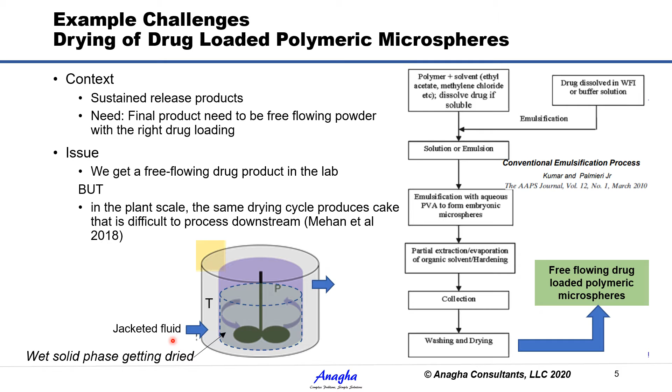But when the product temperature goes above the TG, you get the stickiness and the chances of cake formation increases. So from a process side, what we need to look at is how can we maintain, during the course of this drying cycle, the product temperature always below the TG at that solvent content at any given time.

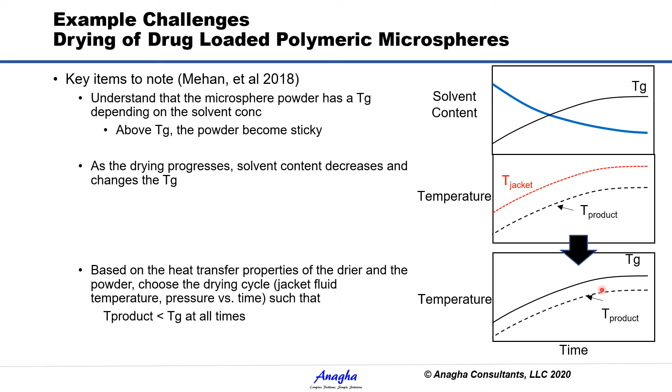Now, how we accomplish that is one of the challenges here, based on the heat transfer details of the dryer. We should be able to control the jacket temperature to achieve a product temperature that is below the TG. So if we can define the drying cycles appropriately, we should be able to get a free-flowing powder even at the plant scale.

As a second example, let's look at a case of manufacture of API crystals of certain polymorphic form and certain size distribution using antisolvent crystallization. This is a typical process used in the pharma industry. Here, an antisolvent is introduced into a solution of API in a solvent.

The expectation is, depending on the mixing conditions involved, we create saturation type of conditions for the API to precipitate out. The challenges in this type of process, as we have observed, can range from not being able to repeatably get the process under control even at the lab scale, and also, when we have a scenario established where we can repeatably get the required crystal size and form at the lab scale, not being able to translate that into a plant scale having, say, a different geometry of the vessel, impeller, etc.

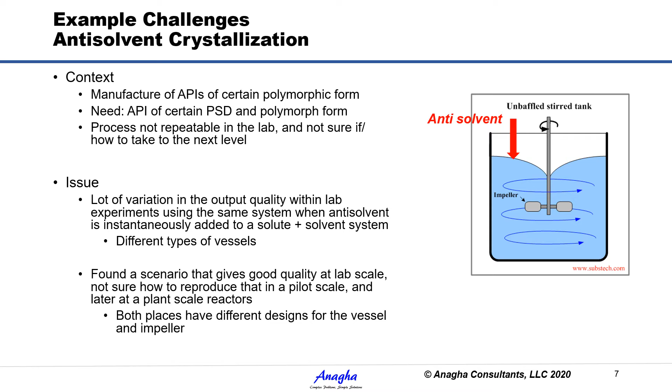Now, for us to understand where the sources of the lack of repeatability are coming from, we need to understand how the concepts of mixing interact with the concepts of thermodynamics that actually create this saturation or supersaturation type of conditions. Briefly, we need to be aware that when we introduce, say, an antisolvent, B, into a solution containing the API, A, the geometry and the mixing conditions determine in how much time B will disperse in A, and what the concentration distribution of B is like in the vessel.

These factors will determine the level of supersaturation of the API, or the level of saturation, and accordingly the formation mechanisms of the crystals will be influenced.

So how the vessel geometry, the location of addition of B into A, the rate of addition, the liquid level - how all these factors influence the concentration distribution - we need to be able to understand, and accordingly manipulate the process depending on changes in geometry or scale, to get crystals of the right size and right polymorphic nature, ensuring no quality changes as you go from one scale to another, or one vessel geometry to another, even while being in the lab.

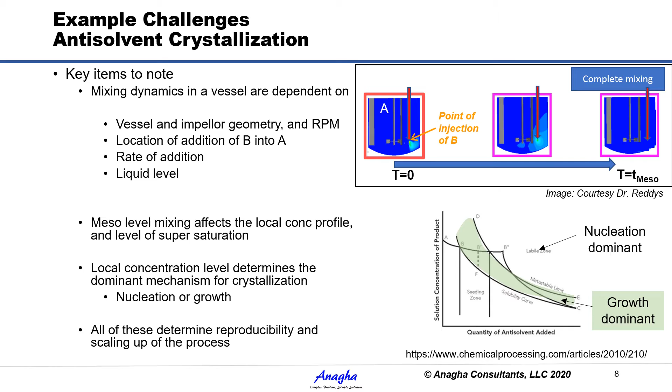As a third example, let's consider the case of dispersion of particles using a high shear mixer and stabilizing them with surfactants. This is a typical scenario when one wants to make injectable nanosuspensions in the pharma space, or nano inks in the specialty material space.

In either scenario, we have API particles introduced in a continuous phase that is getting sheared using a high shear mixer, while surfactant is being added. If you look at what factors impact the stabilization of these nanoparticles, we're looking at how well the particles are sheared, and the increase in surface area because of particle breakage or dispersion - how that increased surface area is stabilized by the addition of surfactant. The balance of these two phenomena is what contributes to getting a good product.

Now, typical issues in this type of process can be batch-to-batch repeatability within a lab scale, and translating a lab scale process into the plant, where one would use an inline mixer instead of a batch process to handle high throughput.

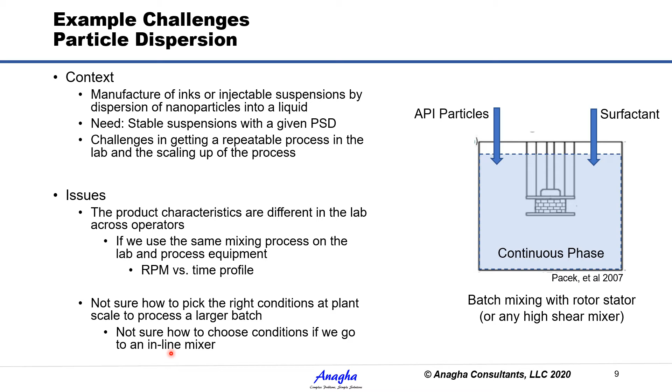What all factors contribute to changes in the mixing conditions when we use this type of high shear mixer is something to worry about, so that we minimize these repeatability issues.

For example, where the mixer is located in the batch vessel, and what is the height of the liquid column that is used - all these impact the circulation time of the ingredients in the vessel, and hence how much effective shear is imparted to the particles in a given time. These things play a role in how well, or what differences could exist, in terms of stabilization of the particles.

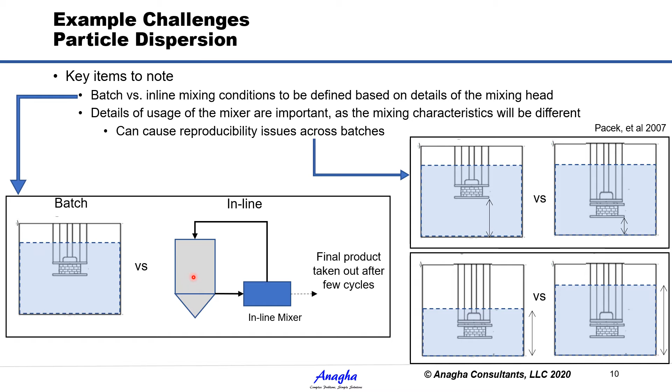In addition, when we think of changing from batch to inline mode as part of scale-up, how the shear rate, the total shear, can be balanced in these two configurations is important.

From the previous three examples, I hope I've given you some clarity into where the sources of lack of repeatability come from in the course of product and process development, especially at the lab scale, and also in translating the lab process to the plant.

Now, if we were to generalize, a typical product process development workflow in any industry would look like this: based on certain customer needs, one would have a lab scale material process development, followed by a bunch of characterizations which would tell us whether what we made is right or wrong. And if they are right, then we take the next step.

The next step involves trials at the customer sites or at the manufacturing scale. Once the needs are met at this scale, then we have a product. If not, we go back to the drawing board and the cycle repeats.

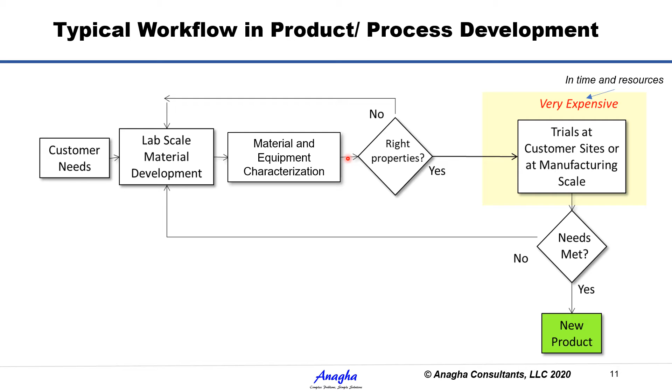Now, how well we understand the characterizations and their linkages to the actual final product properties is very important for making this cycle effective.

If this step of material characterization and its linkage to the final product properties is not well understood - either due to poor translation of the needs into technical requirements, or not using the right methods for characterization, or not understanding the underlying physics in the course of product process development - then we spend a lot of time in this cycle.

In this yellow box, we repeatedly keep going from the lab to the more expensive steps of trials at the customer sites or manufacturing scale, to verify whether what we developed in the lab is right or not.

This can be pretty resource intensive and expensive, both in terms of time and the cost of raw materials, especially if you're operating in certain niche areas like pharma. The cost of the API, etc., can be very prohibitive.

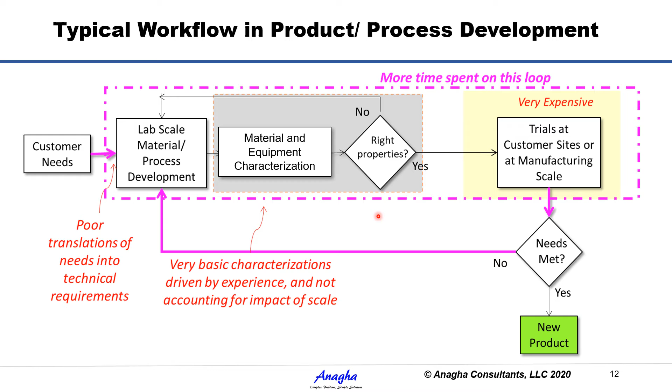If we were to focus on understanding the process and how it impacts the product we produce, its properties, etc., we should be able to focus more on this blue box and efficiently capture any misfires in our product development journey before going through expensive steps like trials at customer sites or manufacturing scale. This way, we'll be able to better translate customer needs into technical requirements, appropriately quantify necessary properties and interactions, and improve the efficiency of our product development journey.

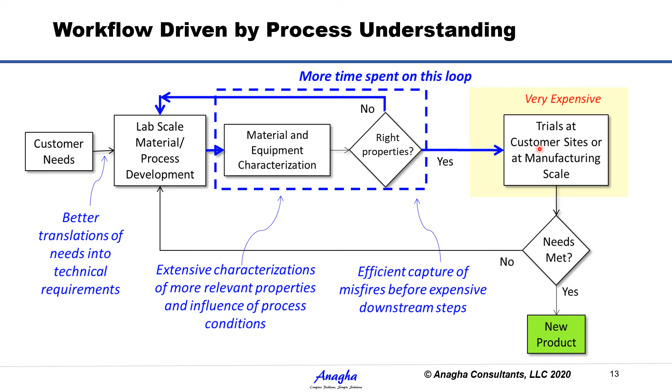In the next few slides, I'll share a case study showing how such an approach, focusing on process understanding, can help minimize surprises during product development and scale up.

This example relates to the scale-up of a pharmaceutical product consisting of a series of unit operations. For this talk, we'll focus on the scale-up of a specific unit operation: lyophilization. For those not familiar, lyophilization or freeze drying is an important and expensive step in the pharma and food industry, used for temperature sensitive products to increase their shelf life.

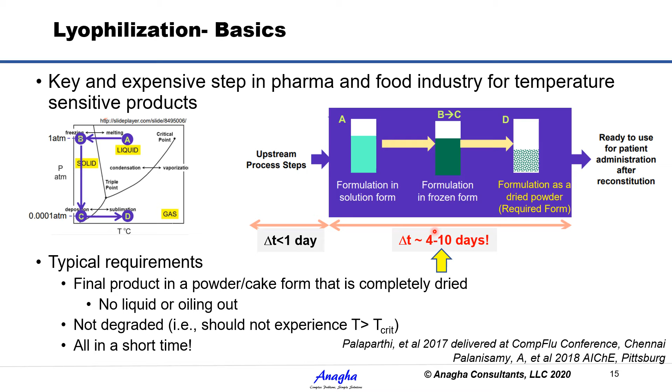Just to give you a sense of the cycle times involved: all the upstream steps in the scale up of such a pharmaceutical product would be very short, happening within a day or so, whereas this freeze drying lyophilization step can take a few days to a couple of weeks. So it's important that we get this scale up right the first time, so we don't go back and forth in trial and error.

As part of the requirements, right after lyophilization, we expect that each of these vials are dried the same way, so that there are no variations in product quality across the batch.

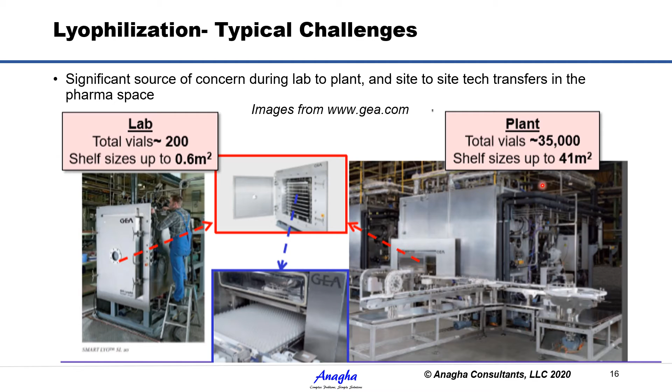What does this translate into in terms of requirements for the end user, like a process engineer? When we're talking about drying, what we care about is how you control the lyophilization chamber temperature and pressure as a function of time, such that the product temperature always stays below the critical temperature we talked about.

How do you define this lyo cycle at the lab scale, and how do you translate that cycle to the plant scale? The caveat is whatever cycle you have in the lab need not be appropriate for the plant, both in terms of the ability to dry off the product and the ability to optimally dry the product.

Given this background, plant scale optimization and scale up can pursue options like doing a DOE type of approach at the plant, or leveraging some mechanistic modeling, first principles type of approaches.

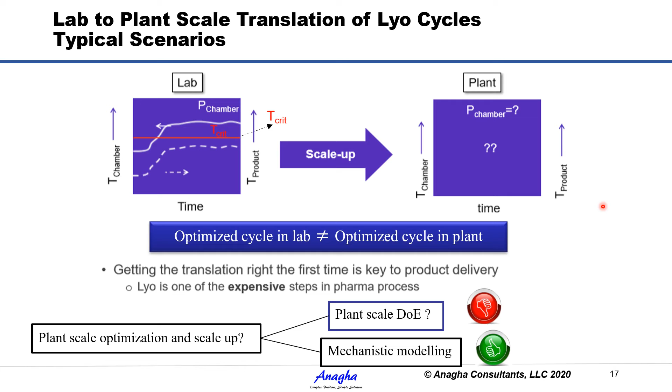Given the challenges in accessing plant facilities and the cost of the APIs involved, DOE at a plant scale can become very prohibitive, and typically your management would not want you to even consider that approach. So there's a lot of science developed in the area of leveraging mechanistic models, and that's what the next slides will show - how we were able to leverage that understanding with this need.

When the unit operates, because of the pressures we apply and the temperatures provided to the shelves, the solvent in the formulation sublimates and goes through the condenser, where part of the solvent is taken out, followed by a solvent trap, which is more relevant for a non-aqueous type of system.

Each of these units can come with limitations. For example, the condenser can only take so much of the sublimated vapors. And in this chamber, whatever shelves, whatever temperature that we are providing, whatever fluid we are providing to heat the vials, can only transfer so much heat to the vials.

So what happens at the vial scale and what happens at the overall equipment scale is something that we should be aware of to be able to effectively leverage this equipment. So this is where the need to understand the equipment characteristics and the limitations they impose comes into picture.

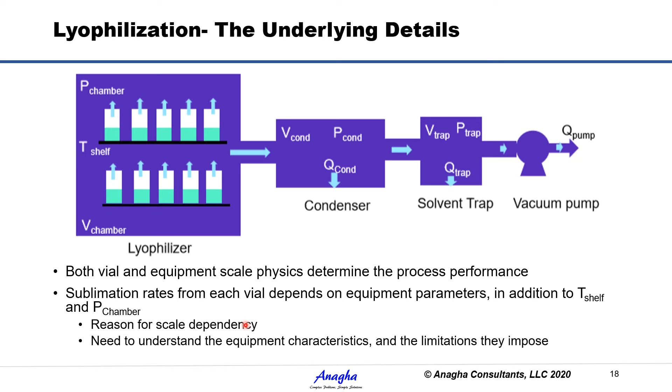And with that understanding of the equipment characteristics and the material properties, say the critical temperature of the formulation that we are using, and the process conditions we impose, we should be able to, through a kind of a mechanistic model, link them to the product quality, like the extent of drying, the uniformity of drying that we would get.

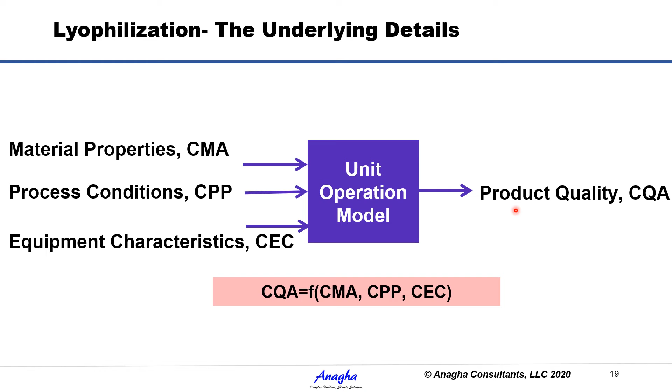If you think of this lyophilization in that sense as some kind of a black box, having some of the material and equipment parameter process conditions as inputs, you can relate them to the product characteristics, both in terms of the extent of drying and the uniformity of drying. And what would that black box consist of?

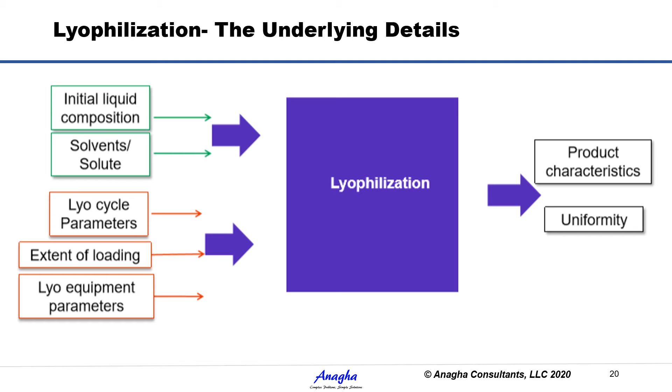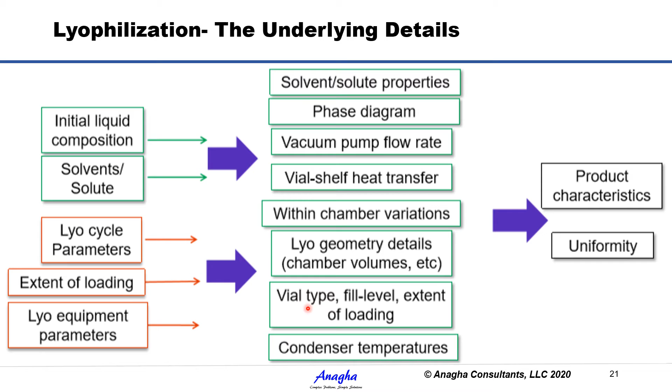Can be a bunch of the underlying physical phenomena, like the phase diagrams of the solute solvent, the heat transfer characteristics, etc., and what type of vials you are using, what fill levels, condenser temperatures, etc., would go here.

There is a lot of literature that captures these understandings in terms of appropriate equations so that we can quantify them. For example, these equations show how the heat input to the vial from the shelf balances the amount of solvent that can be sublimated.

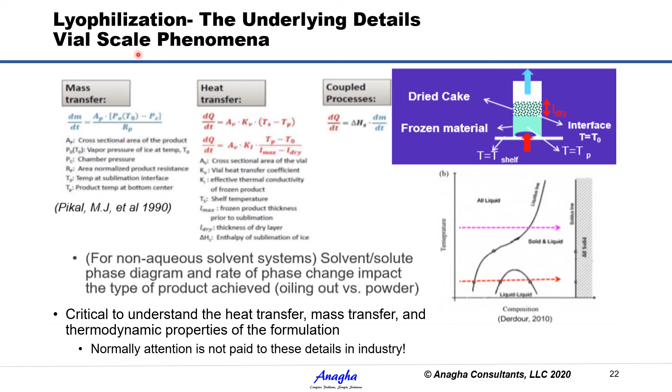If you consider this as something that is occurring at the vial scale, you can expect an equipment scale physics as well to play. For example, in the lyophilization chamber, the rate at which the heat is transferred from the shelf to the vials can be different within a shelf and across the shelf.

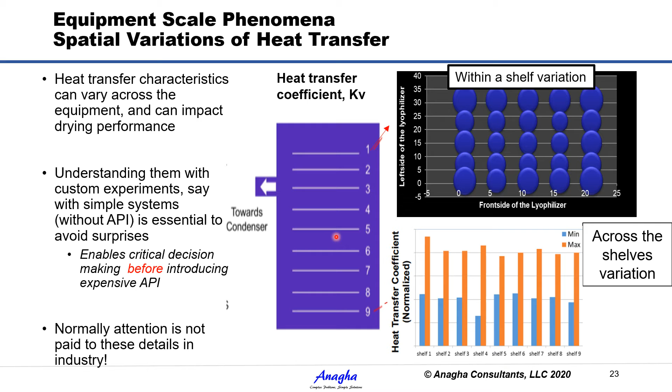This type of information is critical to know before we actually load the lyophilizer with the expensive drug, because with this information we should be able to figure out beforehand how best to design the lyo cycle so that all the vials get dried uniformly after the cycle is complete.

So with details of the material characteristics, equipment characteristics, and process parameters, the literature talks about how there is a design space over which one should be able to operate and leverage the best performance out of the lyophilizer.

Awareness of these type of details helps in the scale up and site to site transfers. There are some challenges still in the industry in leveraging these type of learnings.

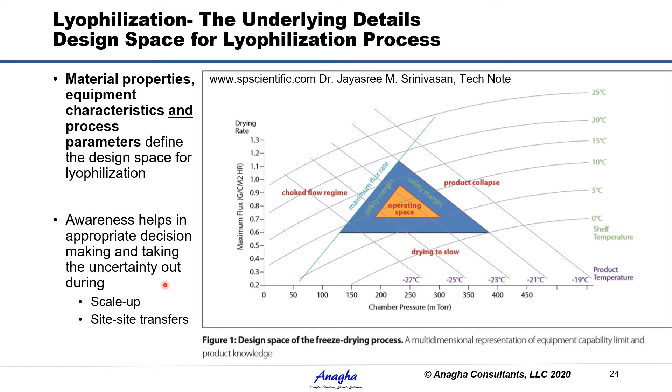Here is an example of the value add one can expect by leveraging process understanding type of approaches during the scale up.

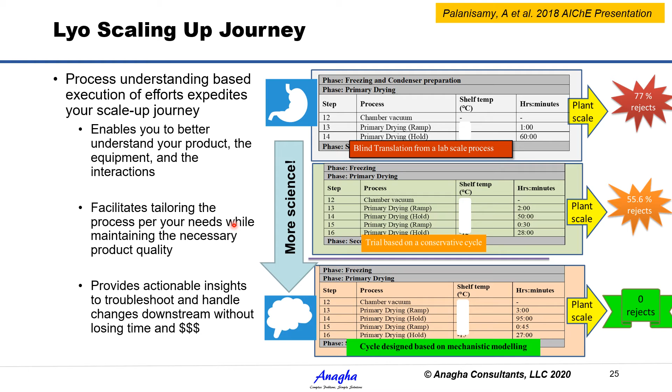So you clearly see that from 80% rejects to complete acceptance, we could achieve just by incorporating the appropriate scientific principles without having to go through multiple trials and errors. So process understanding can help us take the uncertainty out in our scale-up journeys.

And some of the science behind lyophilization is such that these days, not only ensuring that there is appropriate scale up from the lab to the plant, but also how do I optimally scale it up so that, since we talked about the lyo cycle having several days to weeks type of cycle time, how best can we reduce the cycle time through leveraging these principles?

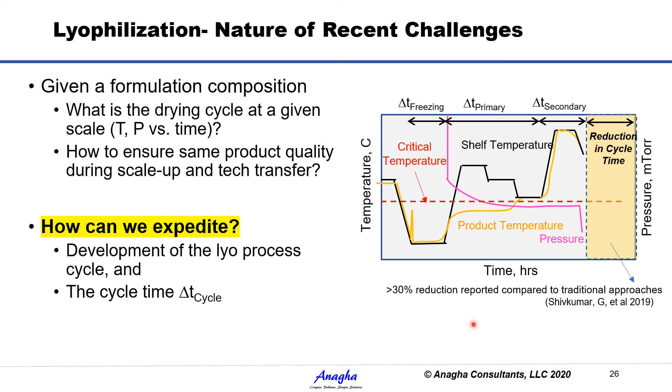There's a lot of literature out there that the industry can leverage, and we see some gaps and some opportunities in that area.

In the next few slides, I'd like to spend some time providing you with some strategies that you can consider incorporating in your workflows so that you can leverage process understanding as part of your product process development efforts.

The first one has to deal with investing and implementing the use of a process engineering and scale-up strategy document as part of the process development journey. We have seen that this is a routine exercise in some organizations, whereas there are some gaps in leveraging this type of exercise in several other organizations.

So we will have a brief review of what this type of activity would involve in the next few slides, but this can definitely be a good value add if you have not already implemented it. The next one is, as we had seen in some of the examples that we discussed, there is a lot of equipment characterization that needs to be understood as part of the scale-up efforts.

If you can ensure that these characterizations, etc., become part of your organization's routine OQ, PQ type of protocols, that would help immensely, because access to these type of equipment has presented some challenges for engineers. Making them a routine exercise as part of the equipment maintenance protocols can be a good value add. Then the last one is appropriately deploying simulations or targeted experiments.

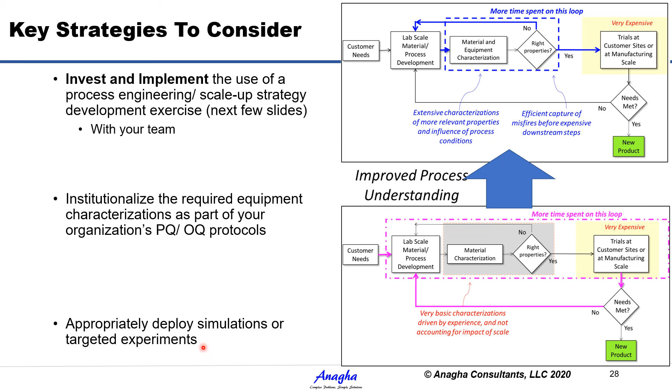For the scale-up strategy development exercise, we will consider an example case of an injectable suspension process involving dispersing of API particles in a continuous phase liquid using surfactant. This may involve a mixing step, either in a batch mode or with an inline mixer, followed by filling into the syringes and storage.

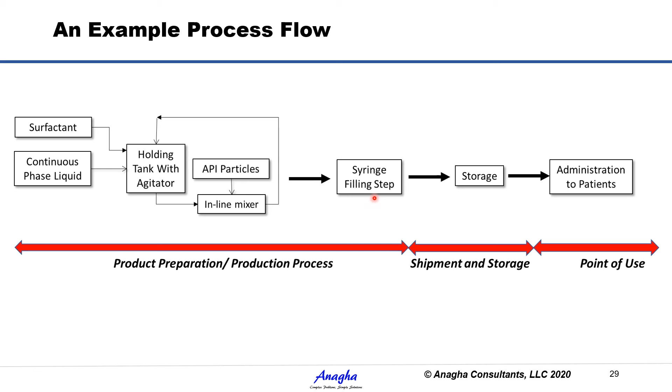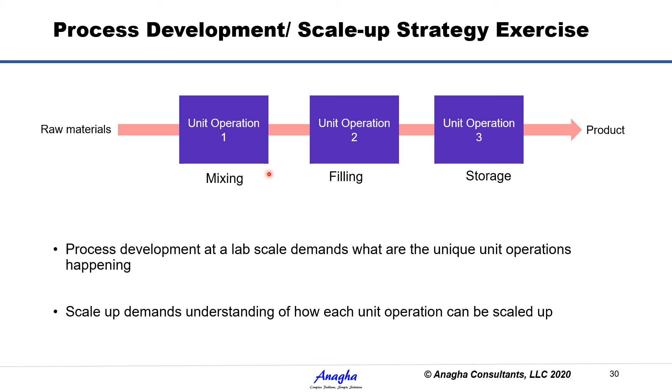This process can be considered as having three separate unit operations: mixing, filling, and storage. So any scale-up activity would mean scaling up of each of these unit operations and understanding all the details involved as part of these unit operations.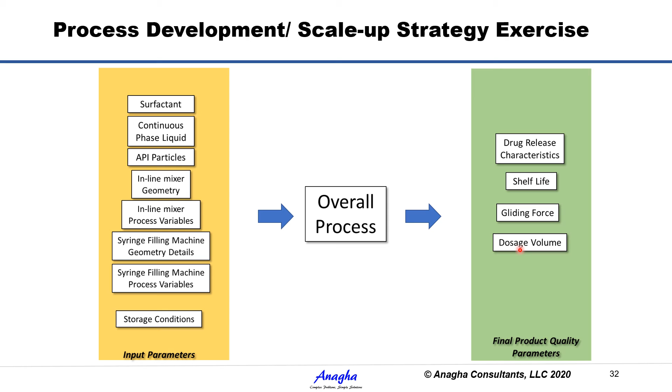Now, once you identify these things, the next step will be at least qualitatively vetting down how the inputs are linked to the output attributes with the best understanding of our physics.

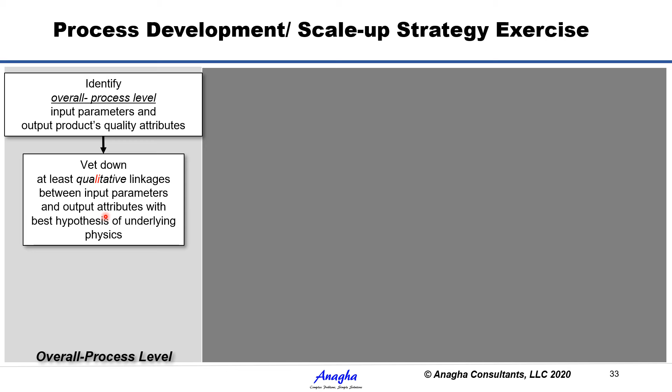That can translate into something like this. These inputs, through some kind of cause and effect type of diagrams, link to the outputs. This way, at least at a higher level, we should be able to understand, well, when I introduce surfactant and continuous phase with API particles, the surfactant liquid particle interactions, I need to know that.

Then how the API particles, for example, when they interact with the high shear mixer, how they aggregate and break, how those dynamics of particle aggregation, etc., are linked to my surfactant behavior in ensuring that I maintain a certain particle size distribution, and that is also linked to the stability and rheology of the suspension.

And at a next level, how some of these characteristics of the suspension are playing a role in or relevant to the syringe filling steps. So via the suspension rheology, and also at the point of use, how the gliding force is impacted by these characteristics.

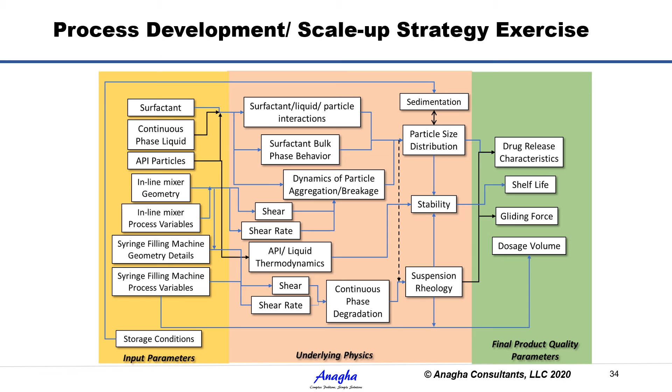Once that qualitative linkage is identified, then from an overall process level, we need to get into the unit operation level. So at the unit operation level, what are the inputs, outputs, and how are they interacting? For example, this would translate into the following in our case.

We have three unit operations. At each of the unit operations, what are all the input material properties, the equipment characteristics, and the process parameters? And what are all the outputs, which could become some of the material as part of material input parameters for the next unit operation?

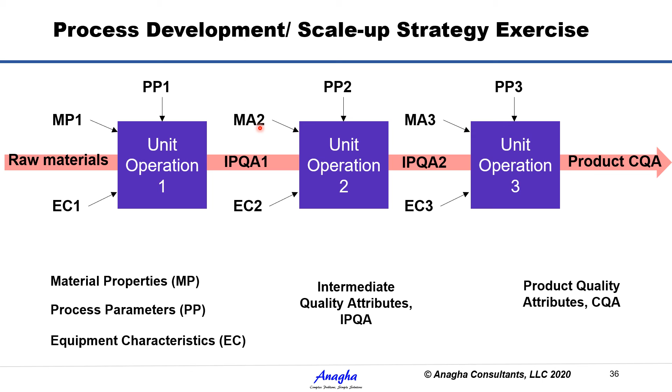So let's look into that with a specific unit operation like mixing in our injectable suspension example. So in this mixing step, we have as material properties, say, the physical properties of the liquid, the particle size distributions. Process conditions would be the mixing RPM, volume of liquid, duration of mixing.

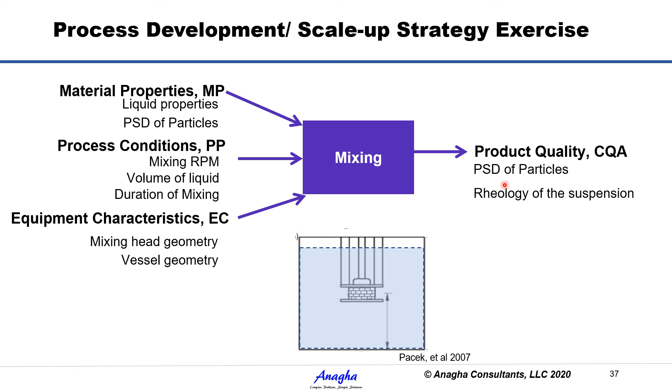Equipment characteristics would be the geometry details of the mixing head, vessel, etc. And the quality attributes of the product would be on the lines of the output PSD and the rheology of the suspension we get.

Now that we identified at the unit operation level what are all the inputs and outputs, the next step is to vet out of these inputs and outputs, which of them can be quantitatively linked to the outputs through the physics that we understand, and which cannot be linked.

In our example unit operation of mixing, we may be interested in finding out how the output PSD is linked to the input PSD and say the shear rate and total shear. We may find that with the current understanding, there may not be a good enough model that would describe these linkages, but there is a good enough theory and mechanistic approach to link the shear rate to the geometry and the process conditions. So this way we can differentiate what aspects are describable with our current understanding of our system and which aspects are not.

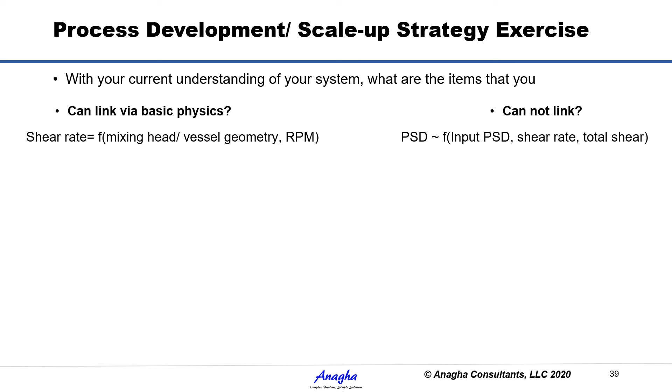Now that we identified, okay, these are the aspects that I can describe with some level of physics, and these are the aspects that I cannot describe, it's time to come up with either customized experimentation or simulations to be able to quantitatively link the inputs and outputs.

In cases where we do not have that understanding via basic physics, we may be limited by needing to do only the experiments to quantitatively link the inputs and outputs.

That would translate into something like this in our mixing process. With some understanding, we should be able to say shear rate is connected through the process to the process conditions through this kind of an equation, and the total shear also has a relationship.

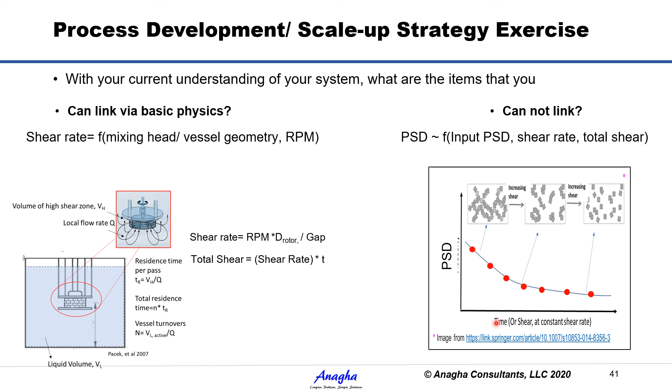Now, when it comes to the particle size distribution or rheology, we may have to do actual experiments to be able to link to the process conditions like the shear rate. This is where appropriate leveraging of calculations, simulations, or experimentation, say via DOE, need to be adopted.

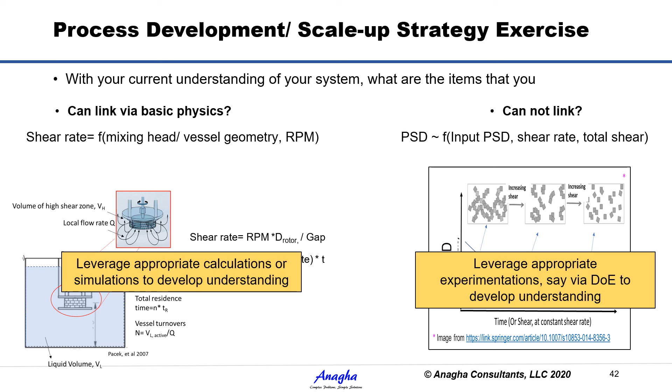With the quantitative linkages of the inputs and outputs through these two different modes, we should be able to, at an overall process level, connect the dots between different inputs and outputs. So starting from wherever we are, through this kind of an exercise, we should be able to better understand our process, and maybe if there is room, we should go through this kind of iterations a couple of times to gain better understanding so that our scale-up is robust.

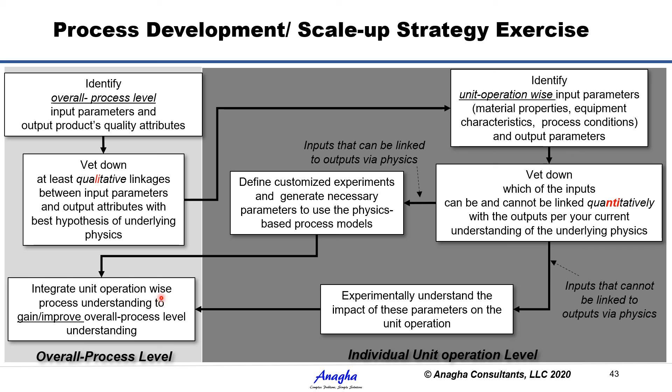On the aspect of the type of targeted experiments and simulations, what I want to recommend is you define the necessary experimentations appropriately and plan and devote the necessary time to do those things as part of your scale-up efforts.

I would highly encourage you to consider this as not an option, but as a requirement, so that you can save a lot of time later troubleshooting. And as I already indicated, some of these equipment-related characterizations, please make sure that it becomes part of your manufacturing plant's routine maintenance or OQ type of activities.

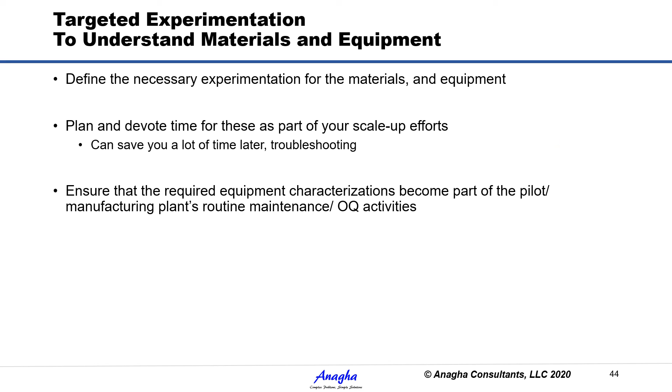When it comes to deploying the right simulation tools for scale-up, a couple of items you may want to watch out for - these are just my personal thoughts. First, I would understand the process first, cast the basic problem trying to solve, and see if a fit-for-purpose model can be developed. This is where basic chemical engineering type of talent could come in.

As needed, you can consider leveraging some of the commercial simulation tools based on your application. You may find out that there may not be one tool that fits all your needs, because some of the programs may differ in the level and the type of physics they capture. You may have to define some customized modules for your specific needs.

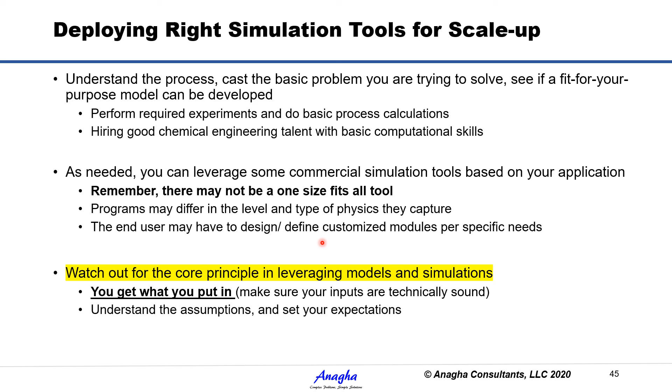The last and most important thing when it comes to simulations and leveraging models is to be aware that you get what you put in. Make sure that your inputs are technically sound and you understand the assumptions of the models that you are using. Understanding the assumptions involved as part of a model and a simulation helps you set the expectations of the value of the simulation output that you are getting for your purpose.

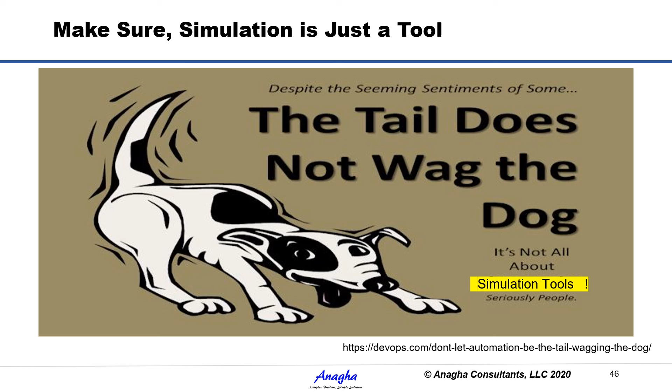Over the years, what we are realizing is the end user will benefit more from simulation tools that are actually customized to his or her need. In this regard, there are several players in the market that one can consider for the simulation tools. For disclaimers, Anagha also operates in this domain.

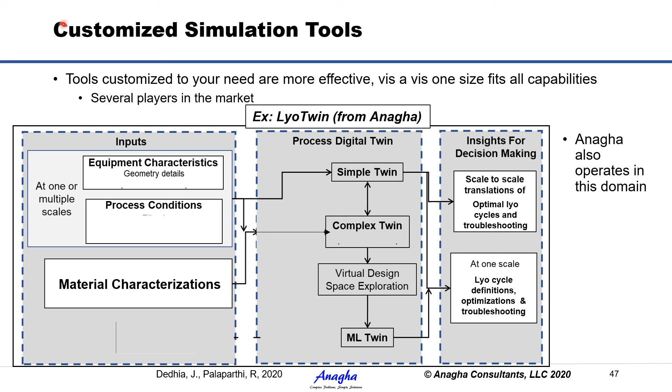To wrap this section, here are the key takeaways that you may want to consider to incorporate process understanding as part of your product process development efforts. First, consider investing and implementing the use of a process engineering or scale-up strategy document. Institutionalize the required equipment characterizations as part of your organization's PQOQ protocols, and appropriately deploy simulations and targeted experiments.